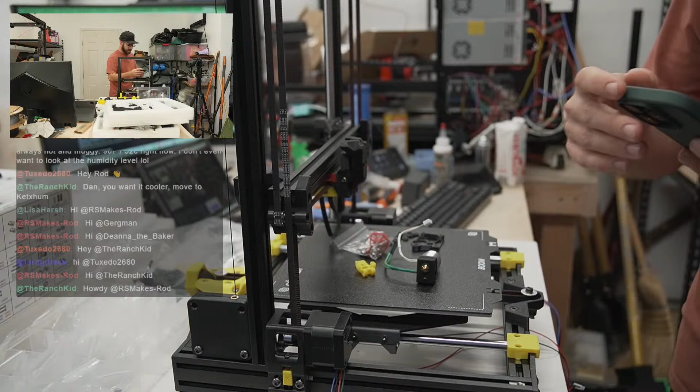I'm gonna show you guys this quick video here. This was me during the storm because water levels were getting above - let's see, this was Saturday, or Friday maybe, hold on. That is me with a snow shovel.

The hail came down so fast and as slush that our drains around the house weren't able to remove it, so it was just dumping onto the house, and it got pretty much to the top of where our slider's base is. I was freaking out that it was going to start working its way into the house, so I grabbed a snow shovel and was shoveling snow this weekend.

It was wild - the most bizarre weather. And then it'll be 98 degrees Fahrenheit next week, so the swings are just insane. Yeah, I couldn't believe it. It was so loud - the combination of the hail with how aggressive it was and how strong the wind was blowing.

It sounded like someone was rapid firing BBs at the window - the loudest sound I've ever heard. Thankfully the hail didn't get above pretty small pellet size, even though there was lots of it, but if we'd had larger hail during that storm I don't doubt it would have shattered windows. It was scary - it went from 'this is neat' to 'oh my gosh, is our house gonna be okay?' So yeah, it's been by far the wildest weather I've experienced.

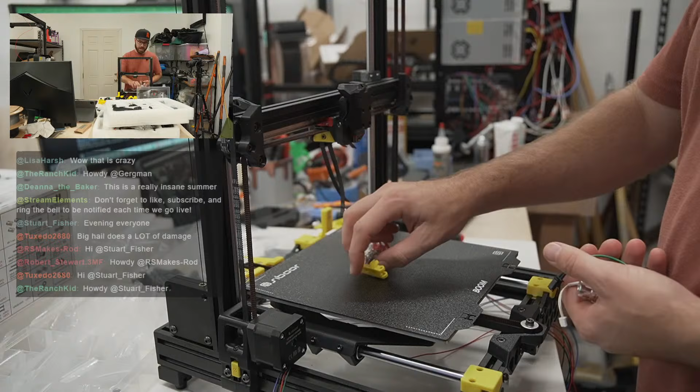The game plan today is that we get the entire tool head done, so that all that's left is wiring, and then we can actually print.

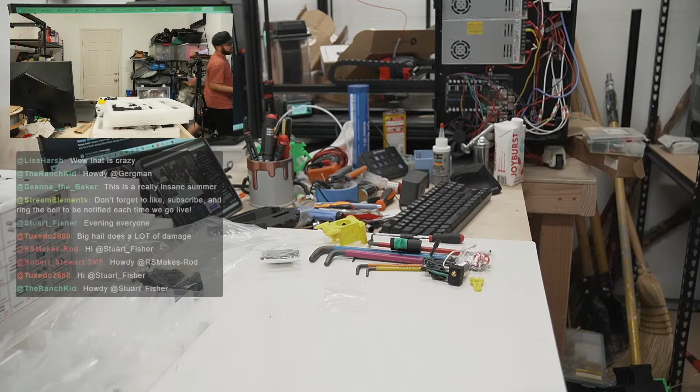So I'm going to- big hail does a lot of damage. Yeah, oops, dropped a piece. I shared that video with a couple of my coworkers, and a few of my coworkers that live in...

Oh gosh, I always forget the name - it's in Calgary. Coworkers in Calgary showed me some videos or photos of hail they got, I don't know when it was, they've been there for decades, but the balls were like that big - baseball size hail, crazy. I know some parts of the U.S. get that too, I think Texas gets pretty aggressive hail. I've never lived anywhere that has hail to that extent.

Okay, let's see. There we go. I think this is on autofocus? It is. That's probably not going to work.

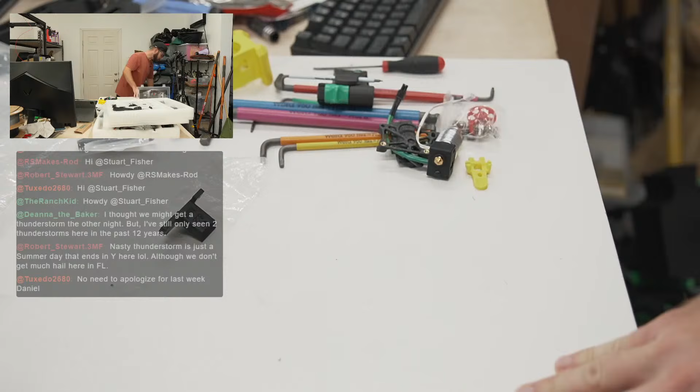Let's do manual focus. Also, in some exciting news, we signed and paid the deposit on the shed, so hopefully next week we get concrete poured. I ended up pulling a permit for the building, so I haven't been able to get a hold of an electrician yet. The game plan is they'll pour the concrete, and the concrete guy is going to put a PVC pipe 8 inches off of a corner and 2 inches in, so there's a route for conduit or electrical wires to go through.

The shed is getting built on the 27th, I think, and then after that I have to get it inspected to make sure it's anchored properly to the concrete. Then I have to figure out electrical.

Maybe between now and then I'll figure out the electrician. I really wanted to go with the electrician who did the lights in here, added all the outlets, and installed the mini split hookup out there, but I called twice and left voicemails, filled out their form online, and it's been like a week and a half with no response, so I don't know what's going on.

We get thunderstorms, and Missouri gets scary thunderstorms. What state are you in, Lisa? I know you're East Coast. Are you not New York? Are you Jersey? I can't remember. A nasty thunderstorm is just a summer day that ends here, though we don't get much hail in Florida. I thought we might get a thunderstorm the other night, but we've only seen 2 thunderstorms here in the past 12 years. Wow, you guys really don't get them. We get them a lot.

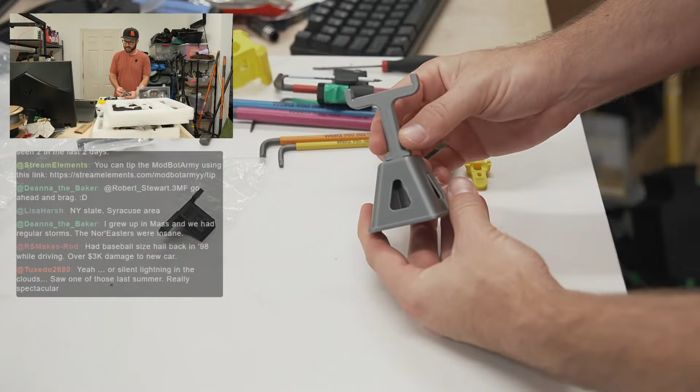I showed Erin these and she said, 'Oh my goodness.' Look at this, guys, look at this little jack stand. It's just adorable. When I saw these I thought, I don't know that I really need those, but once you get the frame built, because of the weight of it all, it helps to have it supported. I also saw someone mention that because of the weight of the finished truck, long term you don't want to rest it on the tires since it can create flat spots, so you put it on these little jack stands. I printed 6 of these since we're doing the 6x6 flatbed, and I had to share them because look at this, it's adorable. So anyways, that's the last of my show and tell for today.

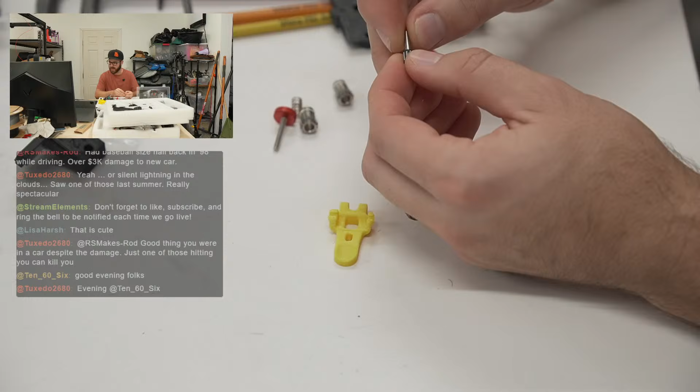It's all BMG clone stuff. I think it doesn't say anything about lubrication, but I'm pretty sure I've always had a little bit on this for those inner bearings. I'm almost positive that's what we always do, so I'm going to do that.

Do I have gloves? I do. Let me grab a glove really quick. These gloves have lasted me forever. I bought a bunch of nitrile gloves at one point when I was doing a bunch of resin printing, and haven't done much resin printing in a while, so they've been sitting. Who's that?

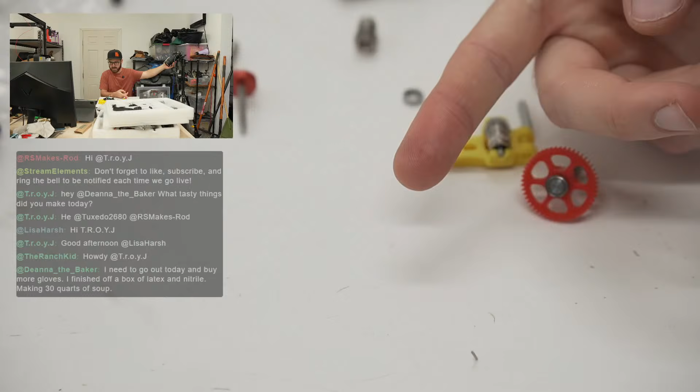There's a tiny, what is that? I don't think I've ever seen this. I don't know, this is just like, maybe it's supposed to be scrap material that just got included. It's a tiny, oops, it's a little metal post. I will put it back in the bag. Let me see, hold on.

What was I gonna say? Sorry, I'm trying to multitask.

Basically they don't offer that program anymore, and if you do part-time, it has to be Monday through Friday, and the cost is like 60% of what our rent was in California, and a little over a third of our mortgage. So I don't know what we're gonna do. Basically, preschool is crazy expensive, is kind of what I've realized, which thankfully it's just for a year, but boy is it a lot more than if you had quizzed me before having a kid, like how much is preschool? I would have come in a lot lower than what the reality is.

Okay, so for this, I am just going to keep this loose, I think, for now. So it's attached to the flat portion of the shaft. It can't spin really, and it can't go beyond a certain point. That could be a bearing. Oh.

Do you think that's part of the piece that I just put in here? Like it's missing. Yeah, now that you're saying that, that makes sense. It could be, that would have been like that when I received it. Let's pop this off and see. I really hope that's not the case, but now that you're saying that, that does make sense as to what it could have been. I hope, please just be like an extra that somehow made its way in here. So I don't have spares of those bearings. It's totally a bearing needle.

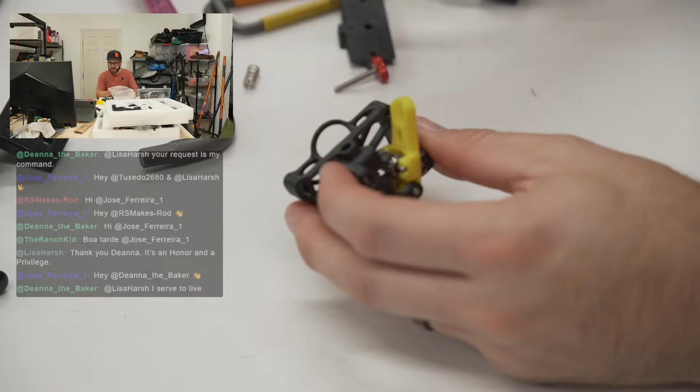Am I wrong? Am I not going to be able to... crap. Oh man, is there no access to the set screw? I might have to take this out, which is not going to be super fun. I assumed there would be access to the set screw on here. It doesn't look like there is, unless... can I go at an angle? Has anyone built one of these before? Am I tripping, or is there no access to the set screw?

I can kind of reach it, kind of. I don't know if that's aligned. Oh wait, you can... no, you can't reach it from anywhere. I can't tell at all if this is aligned. And this is still... it seems like it's spinning. I just don't know if the filament path is aligned. It doesn't look incredibly...

Hold on, let's see. Sherpa guide, I'm curious to see if their guide actually says anything. Alright, let's take a look.

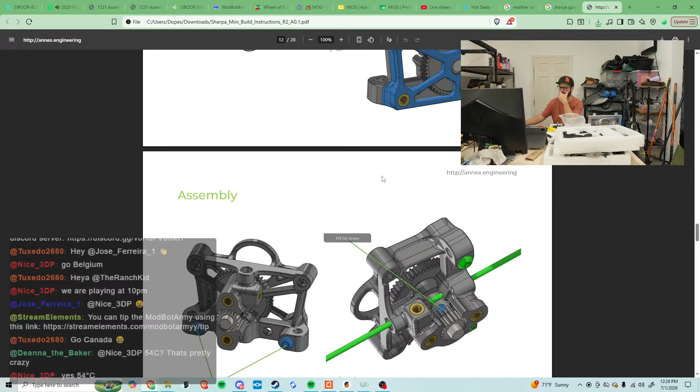Got it, I was supposed to do it prior to putting this in. That makes sense. Okay, so can we pop this guy out? Let's see, first off, can I take this guy off? I can, like that. That came off. I'm so used to doing it after the fact. Why is this thing grinding now?

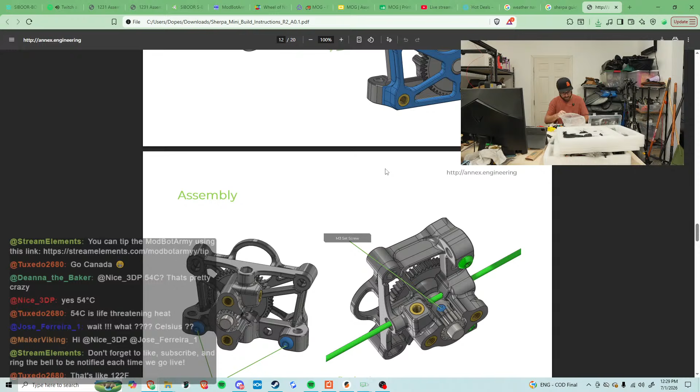Okay. Please give me my driver back.

Hello, there we go. Okay, so it looks like for this, we need to do this now. So let's get our flush cutters that have disappeared. We'll use our wire strippers instead, it's fine. And we will cut off some filaments, like that. Okay, so now this should be included, I think, in the Siboor instructions. I don't think assuming that everyone's built these before and knows when to do this is the right call.

Holy cow. Wait, where is it? Where is it, 122 Fahrenheit? That sounds horrible.

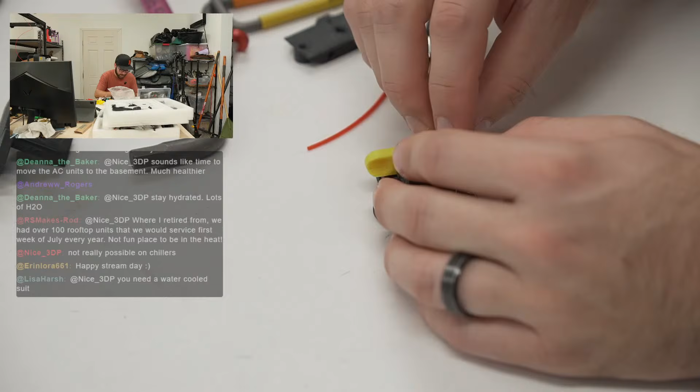Dude, we had like a hailstorm over the weekend, and I was shoveling 6 to 8 inches - no, maybe not 8, 6 to 8 inches of hail that was building up around the house. It was the strangest thing. Today is not that hot, but it's really humid here today, which is probably from all the moisture we've got. But it will be 90 - what did I say? - 96 next week. So we're definitely getting it, the heat is here.

But I lost, it looks like I lost most of the garden. I had like probably 20 or 30 tomatoes that were green and just waiting to turn color, and they got shredded. The leaves are all gone, the branches fell down, and the tomatoes themselves look like someone shot them with BBs. The bird nets flew off of the blueberries, and either the wind and the storm knocked them, or birds came and feasted on all the blueberries. So we will not be getting blueberries this year. A lot of the blackberries got shredded, all the beans got shredded, all the peppers got shredded, all the melons and cucumbers got shredded. So I'm hoping some stuff survives. I Googled it, and it basically said, before you just go out there and remove everything, just let it be for a little bit and see what comes back. So that's what I'm doing right now, but it's hard to look out back at what was my happy place and now see how depressing it looks out there. It just looks really sad.

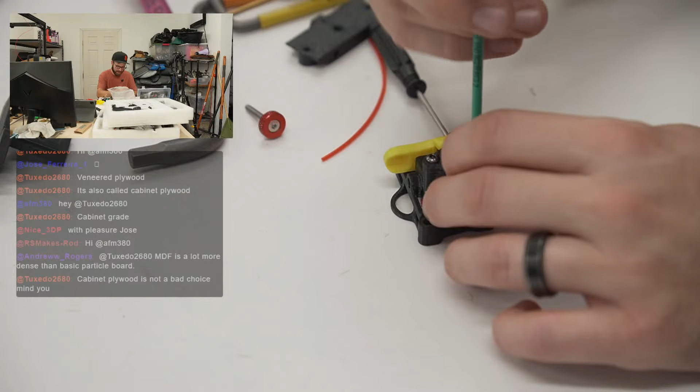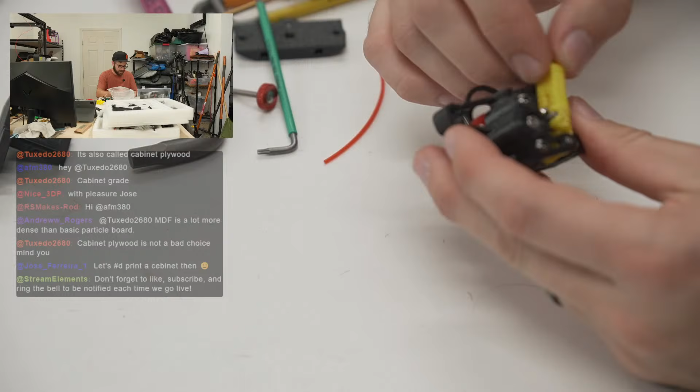Let's 3D print a cabinet then. Yeah, I did plan on, and I still might, because the hinges I'm using now won't be hidden hinges - on the new doors the hinges will be visible, and I really don't care. So I'm planning on probably 3D printing like an IKEA Skadis board that will get mounted to the inner left and right walls of the fish tank. I can use that to hold all the bottles and cleaning stuff. So I'll use some 3D printing with the tank stand for organization, because I think 3D printing for custom organization is like the perfect partnership.

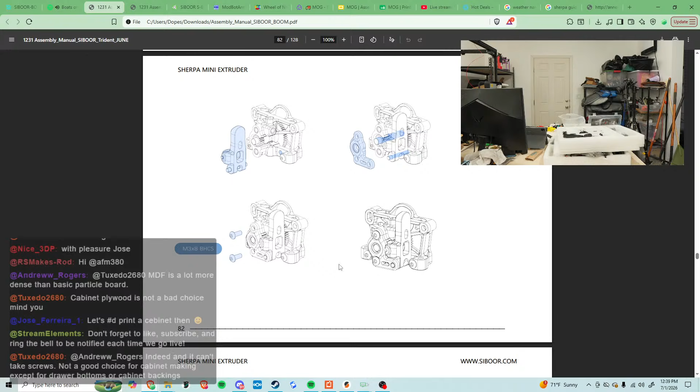MDF is a lot more dense than basic particle board. Yeah, because I've got MDF - gosh, all right, I swear this is the last thing. You guys like this? Yeah, MDF, I don't have particle board I don't believe, but I do have some MDF. That's what's used for my CNC machine for the bed of it. This is what I'm imagining the center of the cabinet's gonna be made out of. CNCing this stuff is awful, it makes such a dust mess, but it's really solid and stiff. It's wood I guess, but it's really dense, like Andrew said. Particle board is more like larger pieces, feels lighter. I don't think I have any of it.

The downside to this stuff is that, like this particle board, my understanding is if it gets wet it just sort of disintegrates. So I'll be applying 2 coats of primer and 3 coats of paint, so it'll have plenty of a seal on it, because there will be water at some point from me doing water changes or cleaning the tank that will work its way down to there.

All right, next we need our extruder motor, which should be here somewhere. There it is, okay. So extruder motor and M3x16s - these are button heads. M3x16s, here we go. Yeah, these are the M3x16s. We need 2 of these.

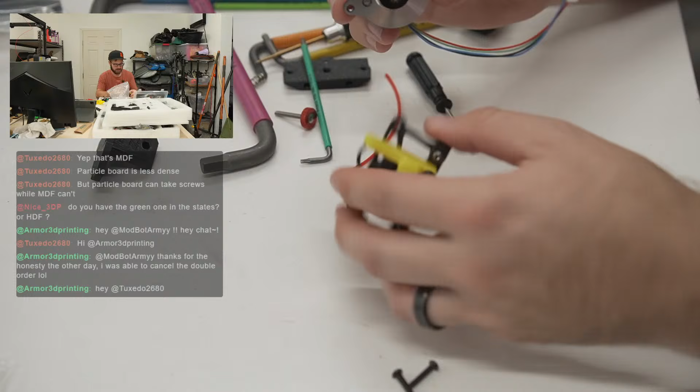So I got a question, random question - it doesn't show which direction the motor wire should be. Let's see if the NX engineering thing does. This doesn't show it either. I'm gonna assume that the wire should go out the bottom.

Screws into the face have been okay for me, but not the edge for MDF. Screws into MDF have no strength. Interesting, I'm working - it's working fine on a table I built years ago, but I'm by no means a woodworker. I assume that if it's a table and the MDF's the top of it and you just screwed it down, it's probably fine because you're not really using it for strength, it's more like left and right shifting would be my thought. But I guess if you're using it for a wall and mounting heavy stuff onto it, I could see the tear out because it'd be different strength.

Hey Raj, hey Benny. Okay, we're gonna just hope for the best. I think it makes more sense to have the wires facing downward, so we're gonna do that. I don't know if that is correct, but that is what we are going to do. About the deploy instructions - there they are, okay.

So my question is, initially I was thinking about just drywalling or sheetrocking the shed, but I was talking to my neighbor and he was trying to convince me that OSB would be a better option just for mounting stuff. So I'm curious to know what you guys think.

I need to get my homework done. Dude, get your homework done, man. I appreciate you hanging out. Priorities, you gotta get your work done, dude. Did you get a nap in at least the other day when you said you were tired? Okay, so that's good.

Man of the Croc with the 28 months. Greetings, all printing people, just got on lunch. Hey, thank you so much, man, how's your day going? All right, so we need our pieces for the hot end now.

Oh, no drywall, okay, so you're just doing OSB. You're doing OSB for it then, for like the full thing.

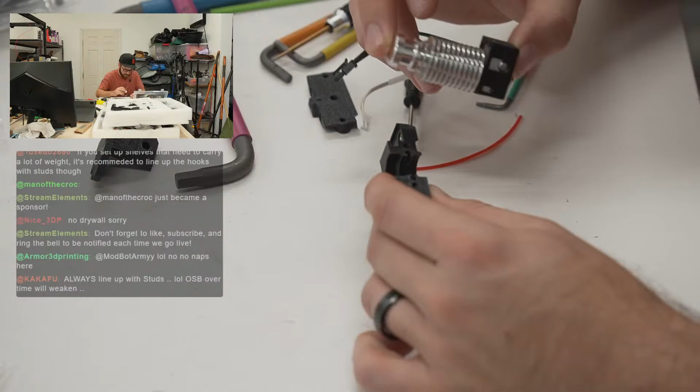Okay, so for this, it looks like it wants to be facing in this direction. Just gonna drop it, why are we not fitting? Did I have it upside down? I probably do, no, I did have it upside down, but why are we still not... in the world? The hook should be facing downward. That doesn't look like that's gonna work. Oh my god, oh that was my heart. I don't know why I wasn't expecting such a big snap like that. It did fit, it did fit. If there's a will, there's a way, that was definitely more oomph than I was expecting. Okay, so we've got this. Now it looks like there should be a thin... yeah, there it is.

No naps? Oh, dude. No naps.

First OSB, then drywall. So you're doing OSB, then drywalling on top of it. That's what I initially thought. That way you have the strength behind it, but then you have the nice aesthetic too. I think the only downside of doing that would be the extra work.

This is loose, we need to tighten this. We'll have to hot tighten it as well. Hold on. If we just tighten the nozzle, that should do it. Let's see, because typically, I haven't had one of these V6 style in a while, but with these, the nozzle tightens up against the heat break, and that's what locks it in.

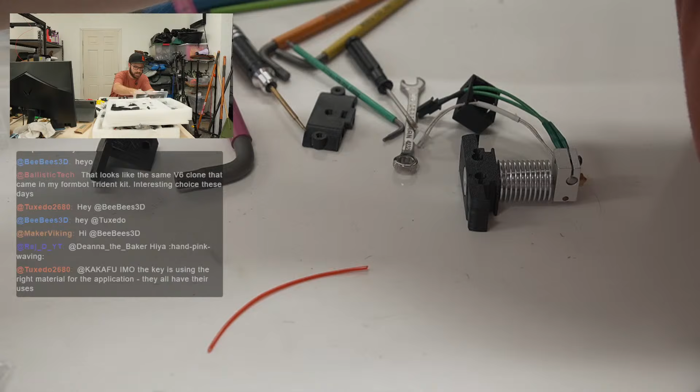I think in some situations the drywall has to come first for fire code purposes. Interesting, I don't use OSB on any of my renos, I see bad things on renos that I tear out, very easy to compare to plywood. Yeah, it's just that this is a shed and cost is a factor, a pretty big factor actually. So that's why, it was either that or drywall. I still am not fully against drywall because that's what in my mind I was going to be doing. It was only after talking to my neighbor, he was like, 'You're gonna drywall it? Why are you gonna do that? Are you gonna live in it?' And I'm like, no, it's primarily for storage, but I'm just thinking for the future since it's gonna be insulated. So I don't know, there's so many ways to do something.

Hey BeeBees, hey Ballistic! That looks like the same V6 clone that came in my Formbot Trident kit. Interesting choice these days. Yeah, I agree, I feel like I would have probably preferred a Bambu style clone because those are really inexpensive and tend to have higher flow and they're smaller. This kit is meant to be a real budget kit, so I guess I understand why they did it, but I haven't- when I saw this in here I was like, whoa, wasn't expecting to see you. It feels like I've taken a time machine back at least a few years, maybe 5 years back.

Drywall is a waste in a shed. You need to print a shed. These are all excellent ideas.

Yeah, you're probably right, I'm kind of getting carried away. The whole point of the shed was really to store stuff, and I started thinking, well, maybe if we do this, it can be this. But I was like, will we ever want to work out of there? And Aaron's like, no. I'm like, all right.

The size we ended up going with is a 10 by 16. I wanted to go a little bit larger, but it would require tearing out the dog run I put in, which I don't want to do - it was so much effort. Or we could do a 10 by 18, but it would bring it 2 foot closer to this door, which would only be 5 foot from the door to where the shed starts. I don't have the shed here to picture it, but I think that would be too close. So I have it 7 foot off this back door where the shed will start, and 5 foot off this side of the house. That's the minimum required - 5 foot and 5 foot from the structure is the code requirement.

Okay, so that is on. Next, we are taking our fans, the fans.

Getting into this, I had to pull the building permit myself, and I've never done anything like that. I must have apologized through email to the inspector a lot because I had to send so many emails. Okay, so I think we need to take the fan wires out of here because they're going to be in this little groove. There was so much stuff that just wasn't obvious to me about what was needed to get the permit.

Originally I thought Tuff Shed was going to be the ones on the permit, but the way our city does things, Tuff Shed had an expired account and they had 5 different accounts, and I'm like, this sounds like a nightmare. Eventually it ended up being like, hey, do you just want to be the general contractor on here - this is your house, right? And I said yes, and he said, oh, why don't you just do that. So that's what we ended up doing.

Okay, so I think this just slots in like this, if I remember correctly. And we'll do our best to line up the fan wires so they don't get too compressed. That seems like it worked okay - hopefully that's okay.

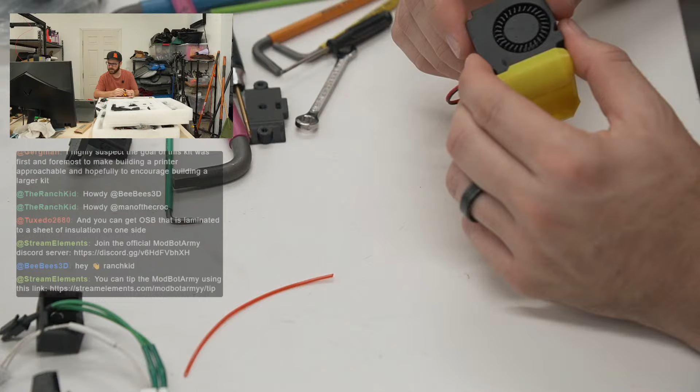OSB is sturdier, lighter, cheaper. I expect the goal of this kit was first and foremost to make building a printer approachable, and hopefully to encourage building a larger kit. Yeah, I agree - it feels like baby's first kit, essentially.

Okay, I don't actually know again what the wiring on this is. I thought at one point there was another set of wires that needed to go somewhere, but this doesn't show that because this is a Sherpa. So we would need Dragonburner, GitHub.

Images, old versions. Pretty sure the instructions are just kind of down here.

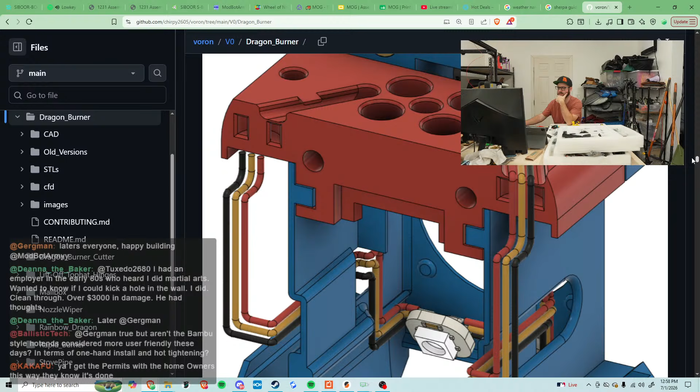I don't think this has LEDs. Yeah, there's no place for LEDs on this, so maybe that's why I'm thinking differently. Unless there are LEDs for the top. Gergman, was there... you left! No, was there LEDs on yours? I don't think there's LEDs. I don't see, since we don't have this down here...

Yeah, I get the permits with the homeowners - this way they know it's done. It's one of those things where since I hadn't done it before, I wasn't sure what I was supposed to do. But once they gave me the option, I'm like, yeah, I have no problem calling the inspector out to make sure. The main question I had was at what checkpoints do I need to get the inspections done.

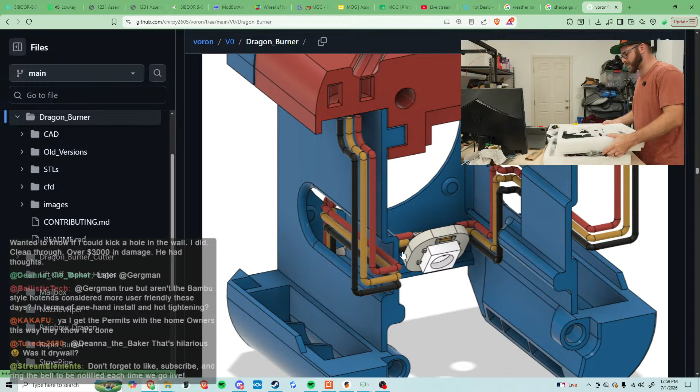They basically gave me the number of the electrical code inspector and the building inspector, and said that for electrical, the electrician would pull the permit since I'm not doing that. For building, the only thing I needed was to make sure I called them out once the building was done, and before I did electrical, to make sure it was anchored properly to the foundation.

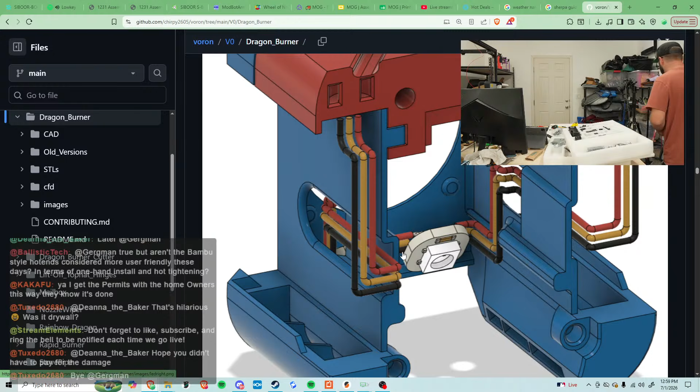Okay, so there are no LEDs on here. I'm looking at this, this is the ToolHead board that's included, and we've got thermistor 0 - I assume this is for the heating element. Hot end fan, part cooling fan, part cooling fan, and we have a motor. That's it.

So there is not. So do they just leave it open on the finished thing? I would think that they would at least place...

There was no check required for the concrete. No, at least that's not what I was told, so I hope that's the case. God, I hope that's the case.

Yeah, for the electrical, they basically said they would need to check that the conduit was buried 12 inches - they said it was either 12 or 16 inches, and I think 24 inches if it was going under like a driveway. Then they needed to check the rough-in after it was done, and once more when the whole job was done. That's what I was told. I can call the building inspector back and verify that, but...

I just want to see whether on the front of this they show... No, these are all renders, there's no actual photos.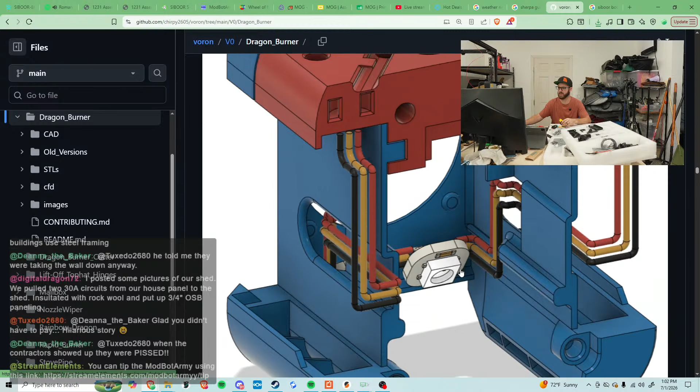So this has LEDs going down and then through there, but where do the fan wires go? On this side, the fan wires appear to go through, and the wiring is getting me on this. I'm debating on watching my own video.

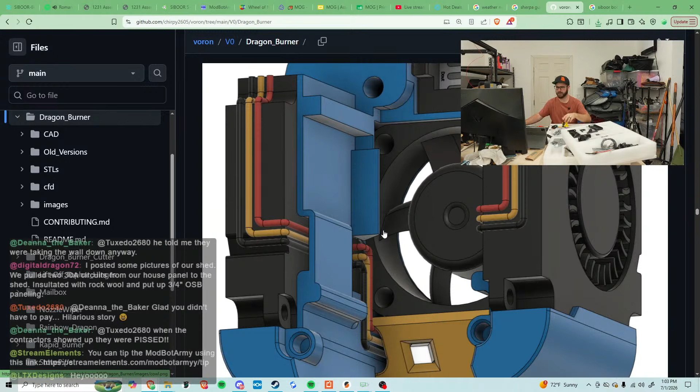Hey LTX, I posted some pictures of our shed. We pulled two 30 amp circuits from our house panel to the shed, insulated with rock wool, and put... That sounds awesome. Okay, I will definitely check that out.

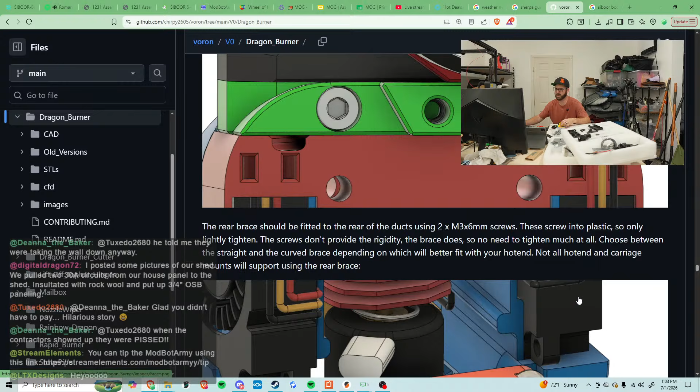All right, I am going to watch my own video on this to see how I routed the wires. So I don't remember.

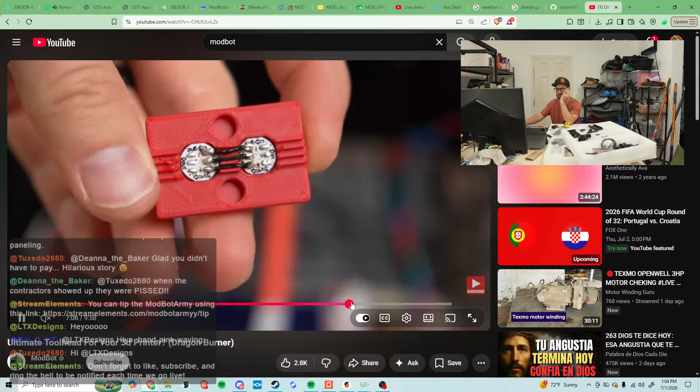Okay, so this looks like the fan just slots in and the wires are going out that side. So I think I need to take off the fan I just put on. Man, that was a bearded me. That was when I was trying to grow out my beard. I actually liked it like that, but it took more work than I wanted.

Okay, so all wires are coming out the back. All wires are coming out the back. So it looks to me like... let me go back to Siboor's manual. Wait, what is... They're doing things differently, and it's throwing me off.

So this is looking like they have their fan wire coming out the top. And then it just goes over this piece. And this wire just comes out there. So let's try that, I guess, since there's clearly a picture of that. So it's not exactly the conventional way of building Dragon Burner. This is a slightly different way of doing it.

Okay, so yeah, it looks like this is basically just slotting in from the bottom. It doesn't want to go in. Okay. Okay, this one looks like the wires need to come out too, actually, because it's going to get smashed otherwise as soon as I get this in. Okay, let's take this out again.

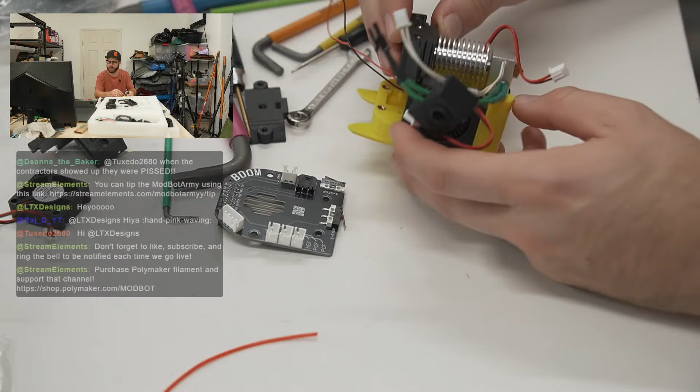Next, we're taking our hot end, and it is sliding in like this. These need to get bent according to the instructions, and then this is just gonna slide in like that. Okay, nice. Yeah, and these wires will just go over the top right there, and then there's our zip ties. Awesome. Wasn't too bad, but it's definitely a different way of routing things.

So next up, we are attaching the top piece. Okay, let's zoom out a little bit. This is just going like that.

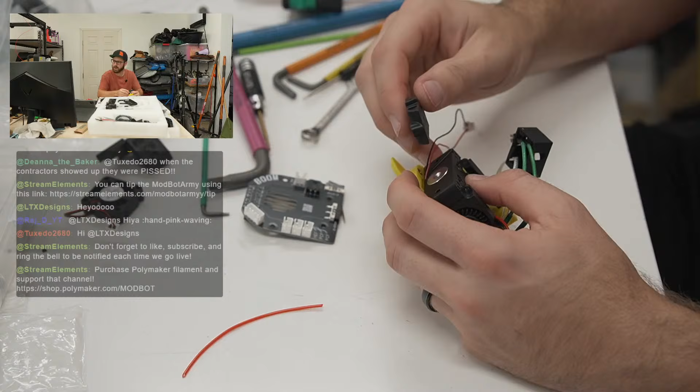Yeah, we need to install an M3 hex nut in a second here, so don't let me forget that, please. But for this, we need M3x20 button heads. M3x20, there they are. M3x20.

Wait, isn't today Canada Day for everyone in Canada? I was about to ask about the 4th, but I'm pretty sure today's Canada Day, right?

Ooh, I should probably put this sock back on too, because the way this is routed is pretty tight. There's not a lot of space to slot this on. Can I get it back on?

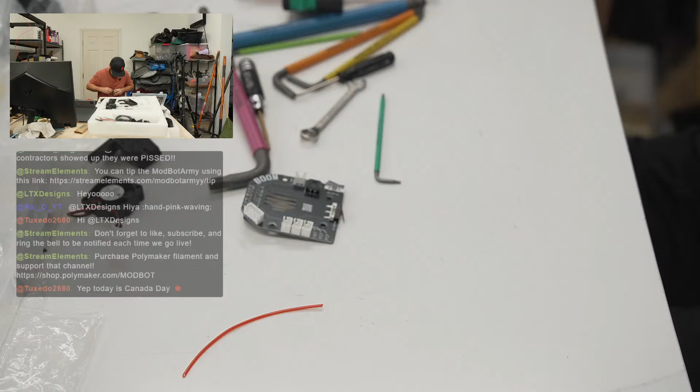Hold on, I'm not looking at chat for a sec, I want to focus on trying to get this piece back on. There aren't slots like where the wires run through on this, there are just... there we go, I got it. Okay, that's not going to be fun after it's on.

Today's Canada Day, happy Canada Day! We gotta do some air horns for that. Is there anything traditional that Canadians do on Canada Day? I honestly don't know much about it, which is odd since I work with a bunch of Canadians, but they never really talk about it. They just say it's Canada Day and take the day off.

Maurice, how's it going man? It's Canada's Independence Day, I'm sorry. Somebody fill me in, Tuxedo, fill me in, give me the scoop.

Okay, that is on like that. Next we need to install an M3 hex nut in the top here, so let's do that before I forget. The only issue is I feel like it's not going to... all the hex nut traps so far in this build haven't been very tight.

Fireworks and beer, definitely. Since we've moved into this house, we do a block party thing, typically at our house out front, since we're at the end of the cul-de-sac. This year it'll be spread out more since they put up flyers for the street, which normally we'd just call the 8 families we know. One of the neighbors will be rolling a grill down here, and our neighbor across the street, we always pitch in and he does a fireworks show. It'll be awesome, it'll be Landon's first 4th.

Okay, so this says the pulley jig can be used to trim the top of the PTFE tube to the correct length. Trim the PTFE tube after you've mounted the hot end to the plastic hot end mount, and after you've inserted the PTFE tube in as far as it can go.

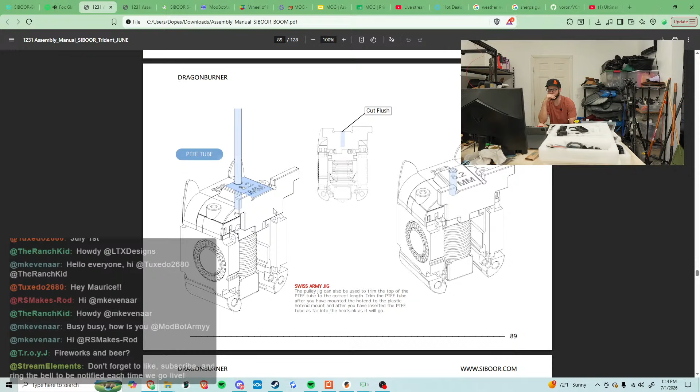Oh okay, I get it. So where is the jig? Is this our 8.2 millimeter? Okay, got it, got it. So basically it's saying trim it now. Where is our PTFE tube?

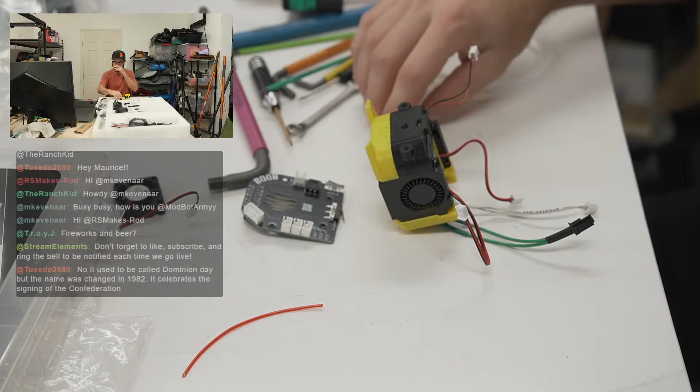PTFE, where are you? Oh, there it is, it's white and it's on white foam so I couldn't really see where it was. Okay, so it looks like it wants us to slap this on like this and then shove this through here, through there. Okay, so that's how we want it.

Now, what do I have to cut with? You know, I cut myself pretty good with a razor blade before, so I'm trying to avoid using just razors on their own, but that might be all I have right now. It's just these razors. I'm going to do this not zoomed in, just in case. Give me a sec, wish me luck, I'm going to be quiet while I attempt to cut this.

Okay, that worked, that was a little scary. Putting the razor back and popping the top back on it.

It used to be called Dominion Day, but the name changed in 1982, celebrating the signing of the Confederation. Got it, nice. Is there anything people traditionally do on that day, or not really?

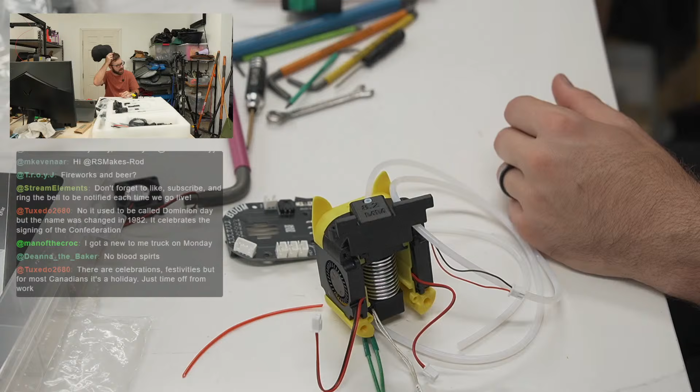I got a new-to-me truck on Monday. That's awesome, congratulations, no blood spurts? No. Yeah, I cut myself, it doesn't look bad at all, just a tiny little skin thing healing over there. But I was opening a box with a razor blade and I was tired, and those are not a good combo. The razor stopped going but my finger did not, so that was not fun.

We will... do I have a... there should be a V-bit somewhere here. Here's the empty box for where the V-bit should live, let me see if I got it. If not, I know where some of my CNC tools are, so I can grab another one, but there should be a fairly large V-bit laying here somewhere. Not seeing it. Oh wait, no, I hallucinated and thought I saw a V-bit. Where are you, where are you?

Okay, I am going to grab another one. Give me un momento, they should be in this box. Let's see, this box is for drip irrigation, this one is for end mills. There we go. I'm gonna put it right back in here though, because I had two of them and I'd like to keep one for actual CNC stuff. So let me use it really quick and then put it right back. I'm only allowed to lose one.

So we are just going to take this little V-bit and spin, spin, spin, spin. I'll do a tiny more spin. Okay, that looks good. That is on. Let's put this back in here and back in here.

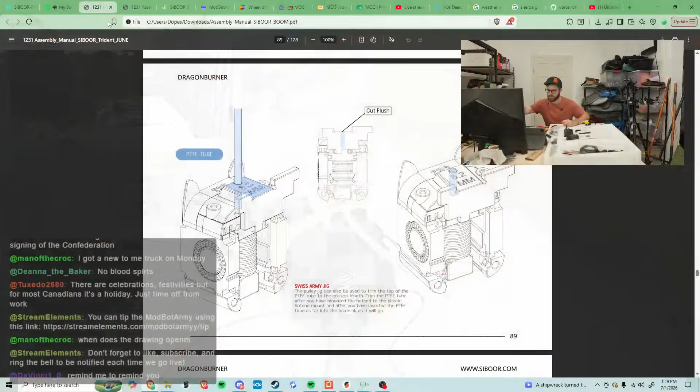Okay, so we've got our PTFE in, and next we are installing the extruder. There hasn't been anything about wires yet.

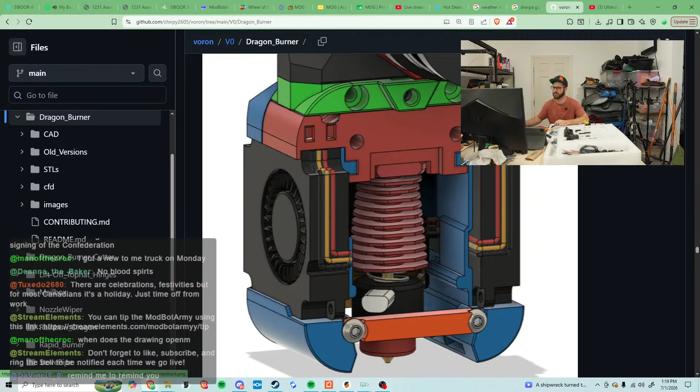Okay, so it looks like the wires are basically just gonna be ran upwards. So that's kind of the downside of having this guy right here, because he's up here now and he's just really long. So I might end up recrimping this guy, but for the rest of these I think they're pretty much just going on like this. I think these guys just kind of route up sort of like this. Yeah, let's at least attach a few of these guys.

I did see zip ties a second ago. These might be too big. Did they give us zip ties? Yeah, they did. Whoa, are they smaller? They are smaller.

What kind of truck did you get? Remind me to remind you. Perfect, sounds like a plan. Okay, that's not going in easily. There we go. Wait, there are celebrations, festivities, but for most Canadians it's just a holiday, time off work. Got it. So that would explain why most of my coworkers just don't really talk about anything they're doing and just say it's Canada Day, I'm not in.

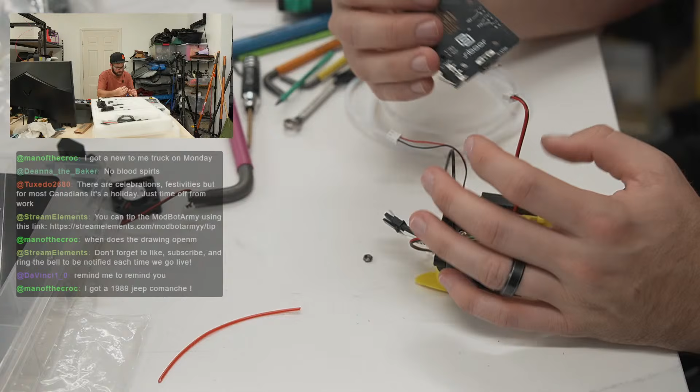This is for the hot end fan. And assuming this is going - wait, is this mounting up top possibly? Hot end fan would be right here. I'll just end up crimping this one. Actually it probably goes like that. I don't know, I'll just end up crimping that one after. I don't know how much length I want. I'd rather have it longer now than cut it too short and have to solder on additional wire.

1989 Jeep Comanche, it's definitely a project but a good one. Nice. Is it driving right now, in driving condition, or did you get it as a project vehicle that you're gonna repair and sort of restore?

Okay, probably shouldn't have done it that tight. It'd be nice to have a little bit of slack. There's a little bit of slack. Okay, so that's good. I did find flush cutters.

Now, let's not forget our PTFE tube is going in this direction. Now we're taking our extruder, and our extruder is mounting like this. Nice.

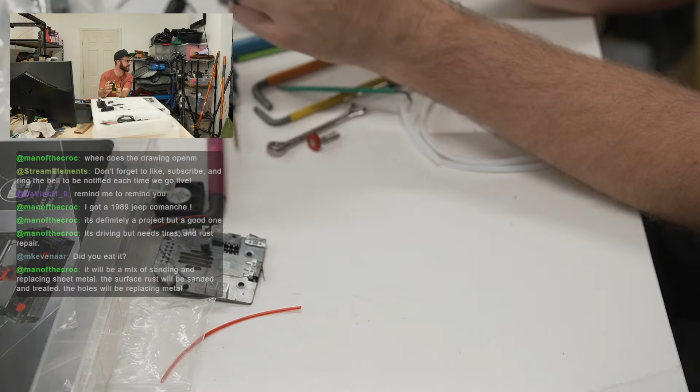What's Jack doing playing? Either playing Mario or... mm-hmm.

All right, Deanna wants to see the baby. All right, let me grab this guy. He's still in PJs. Hi. You would say hi, just woke up. I'm your big dog. All right, I'm gonna bring him to the close-up cam. Wait, I think I'm on the close. Yeah, I can't tell if he's visible. Yeah, he's visible. Wait, Landon, look right here, look at the camera. Whoa, he said hi everybody. You excited for your first 4th of July, buddy? Excited for your first 4th of July?

Yeah, he's spending a lot of time on his feet now. This is our big baby. Yeah. What do you think, huh? He doesn't come out on this side of the garage very often, so usually when he's out here he's like, there's a lot of stuff to see.

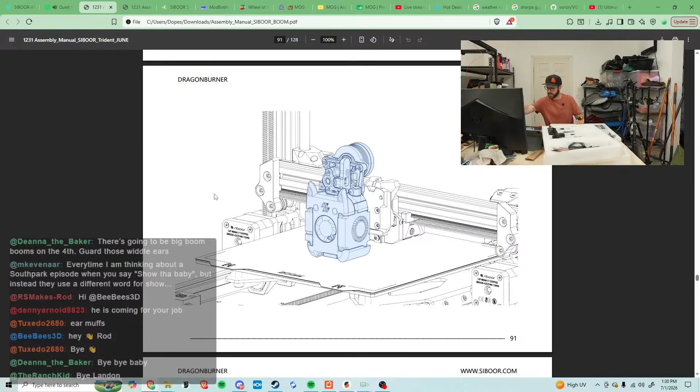Okay, so that's on. It looks like we're basically mounting this now. So let's do that. Let's move as much of this stuff out of the way. Oh, let me put the... I just realized I never put the tension screw back on. The tension was kind of crazy on this, even without it really having tension. So I'm curious to see how that does and whether I need to go with a different spring, but we'll see.

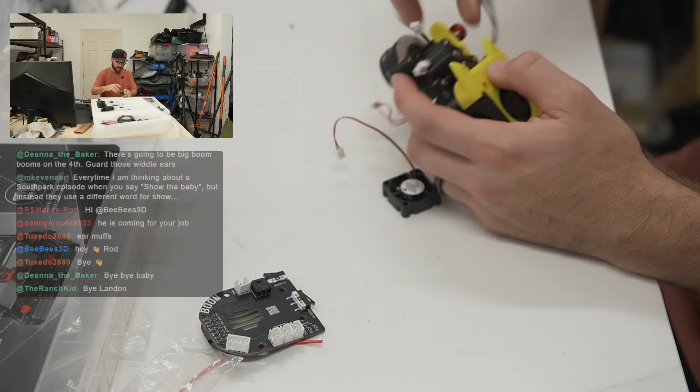Let me let Monkey in. Monkey! Come on, bub. Come on, this way.

Okay. I probably need to cut the belts a little bit on this too, now that I'm thinking about it. Let's see.

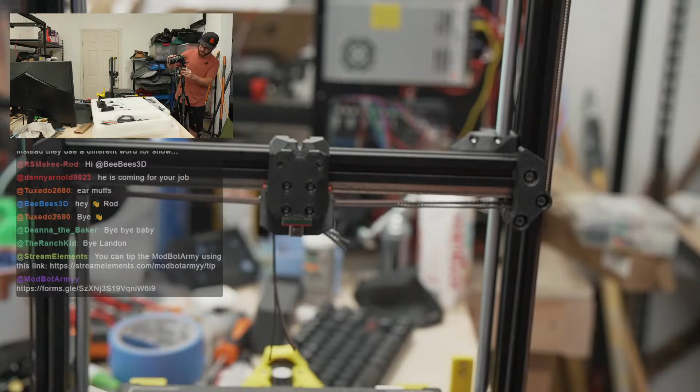And I'm just gonna, we'll go from this angle. Make sure this is in focus. Yeah, it looks pretty good, right? Okay, so I'd like to keep some belts if I can.

Oh yeah, this won't be able to go. That's interesting. So the toolhead cannot reach all the way. That's as far as it can go. That seems wrong - it binds, like, okay, that's where it stops. It's basically, I don't know, is that a 20 millimeter gap? And it's on both sides. Doesn't seem right to me. Why would that be the case?

I think I installed the belts wrong. I think the belts need to be higher up. The belts are at an angle. I think this is wrong.

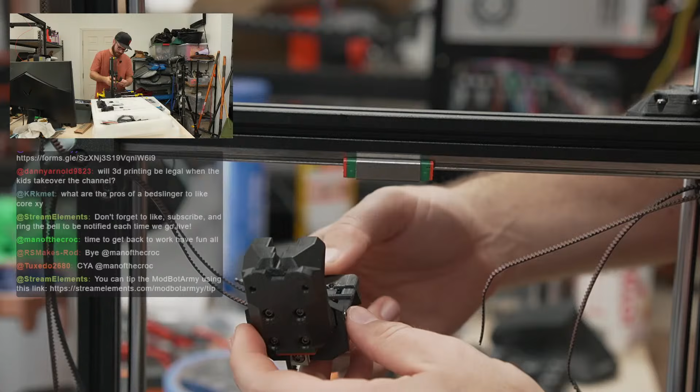Yeah, there's holes on top, so the belts need to go basically through here and then get grabbed, which is the wrong one. It makes a lot more sense now. I thought it seemed funky, I should have questioned it more when we were doing it.

Now that we've got that in, I actually don't think this will be that hard to correct. So we can now get this piece at least slightly back on, and we'll deal with the specific tensioning in a bit.

Yeah, and we can still pull this tight after the fact, so let's just leave this. Actually, we'll tighten it up so it doesn't fall out on me, but that should be fine. And then on this side, do the same thing. So we'll remove this.

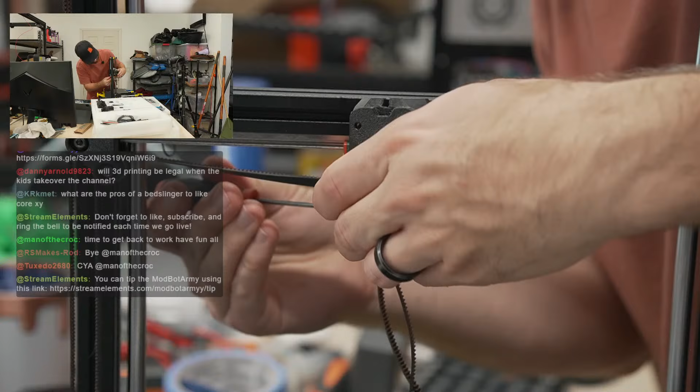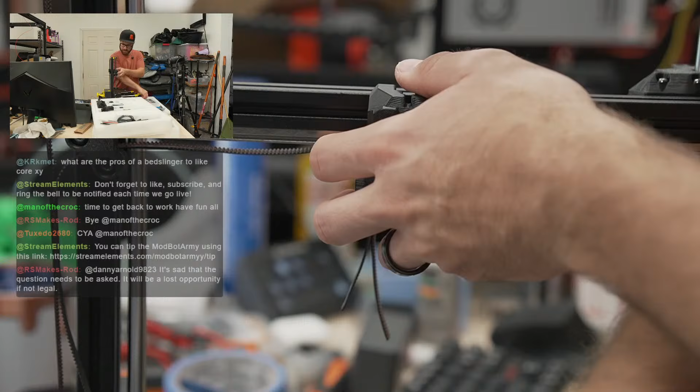Okay, drop this through here. Like that, drop this through here. Like that. Okay, now that that's in, I should be able to just... Actually, okay, so once I compress this, these belts aren't going to move at all, so I need to not fully seat this. I need to basically just thread this in a couple turns. So let's see, yeah, let's just do this a couple of turns.

Can I still pull this? Wow, that's... oh, I tightened that one. Can I still adjust you? Yes, I can. Okay, so that's what we need to do. We need to put all 4 of these screws in, just a couple of turns. Okay, that's in. That can still be adjusted.

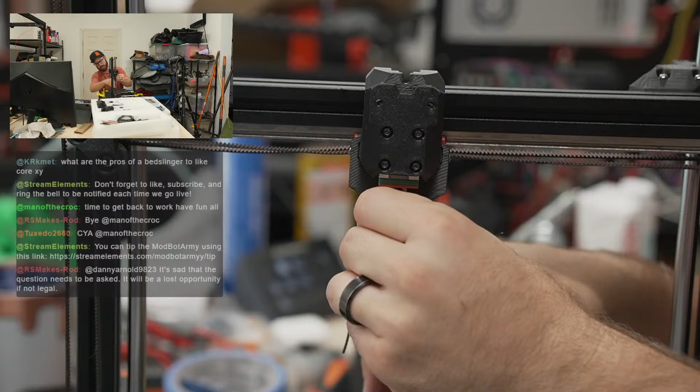Okay, so I am going to do my best to make sure that these are pulled evenly. So that seems basically correct. Now I'm going to tighten these down. Yeah, those look even.

Why are we spinning still? This is just infinitely spinning. That doesn't seem right. Oh, it is holding tight, so I won't question it.

Spectra, how's it going? Kenneth, how's it going? I just got this back on, and like we built the tool head, and I was going to mount it, but when I moved this to the side, I realized that it couldn't actually go all the way. It still can't go all the way.

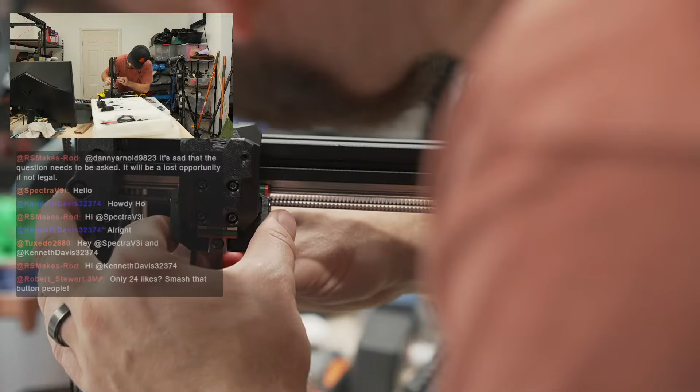What is going on now? Hold on. Okay, now I don't know what's going on, because the belt is straight, but it still is kind of binding at the ends. It is still stopping at the same distance. What are we rubbing on? That's what I'm not understanding.

It's not our belt. Huh.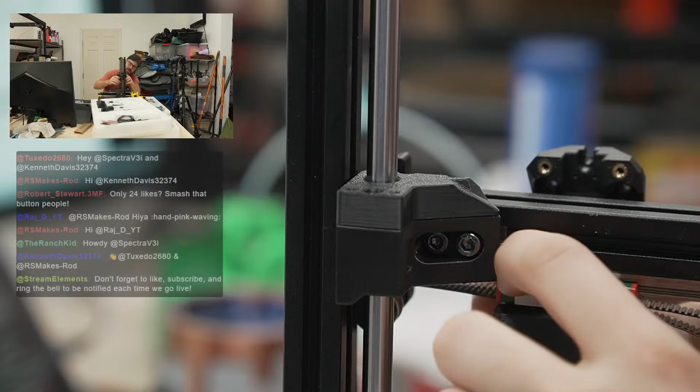So it looks to me like what's happening is that once this block gets right here, it's rubbing on the metal of the block. So why is that happening? Yeah, it's definitely what's happening because it's starting to wear the plastic.

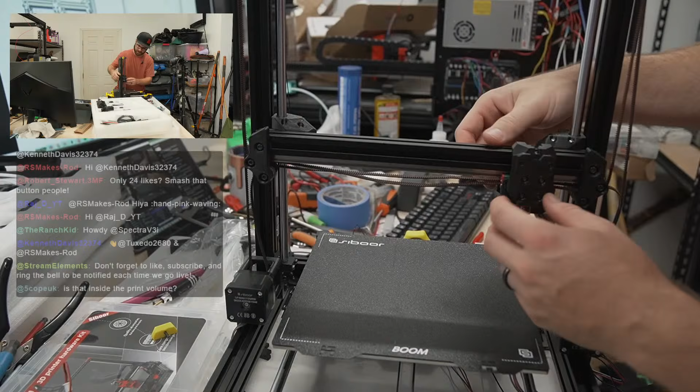So if I attach this, hold on. If I drop this, I should tighten all the belts again because regardless, let me get the belts done before they pop off a pulley or something. So that's routed fine, that's routed fine. Those look still centered. Oops.

Hold on, let me just make sure that everything looks like it's still... Nope, you're not right, you need to scoot over just a hair. Like that. Okay, everything else seems fine, so let's tighten this up.

Yeah, it's interesting. I mean, they provided the printed parts, so I can't see it being a tolerance thing with the printed parts, unless they went with different rails at one point that are slightly wider.

Okay, can we still pull this? Yeah, we can. Okay, so I'm gonna... Alright, it seems pretty good. This needs to get pulled one more. Two more.

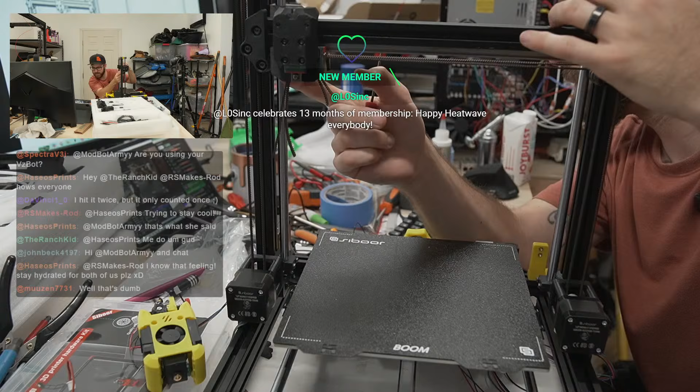Los with the 13 months, thank you, happy Heat Wave Wednesday. Man, so everybody's feeling the heat. Yeah, it's hot in here today. I don't know what it is in the garage, outside it's only like 70. I should have the garage open.

Oops, Tampa weather - so today the high is 81, then it climbs to 84, 88, 95, 91, 94, 98, 98. Oh, next Wednesday is going to be brutal for you guys. That is going to be awful, considering I'm sweating pretty hard right now and it's 81. What's the humidity today? It says it's only 38%. Today should be nice, I don't understand.

John with the 7 months, thank you man, that's crazy. That does feel - because you joined during the Micron build, right? It's like 96 Fahrenheit, oh gosh. Yeah, so quite a few of you are in New York City then. That sounds horrible. I wonder if when the heat wave comes this way, it's going to be nicer for you guys over there. Do you know if you're supposed to get better weather next week when it gets hot toward the western United States?

Okay, before I tighten anything firmly, I want to verify that this is still sliding smoothly. Fingers crossed. No, it's rubbing again. I wonder if I need to apply more push force when I'm tightening it.

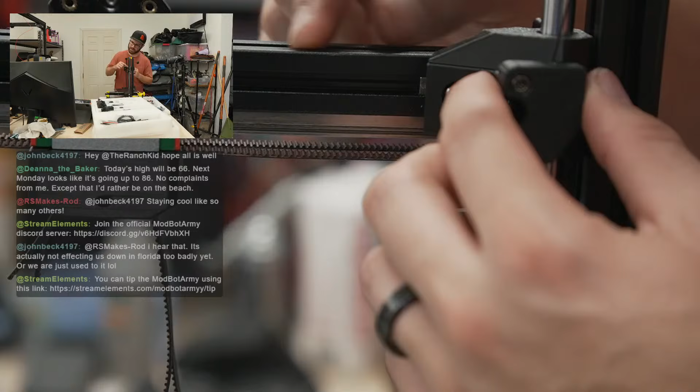Someone had the idea, I can't remember who it was, Clown that had the idea? I think it was Clown. No, Lord Git. It was Lord Git. They had the idea of try loosening, because I used an alignment jig to center this rail, but they had the idea of, hey, maybe if you loosen the rail, you can have it favor this side because I don't need very much. And it's like when it's loose, it seems to be working fine, but when I tighten it up, it was rubbing again. So the other idea I have possibly is if I loosen these screws and see if I can make the extrusion favor the bottom side of the T-nut, maybe the combined effort of both of those things would clear it, you know?

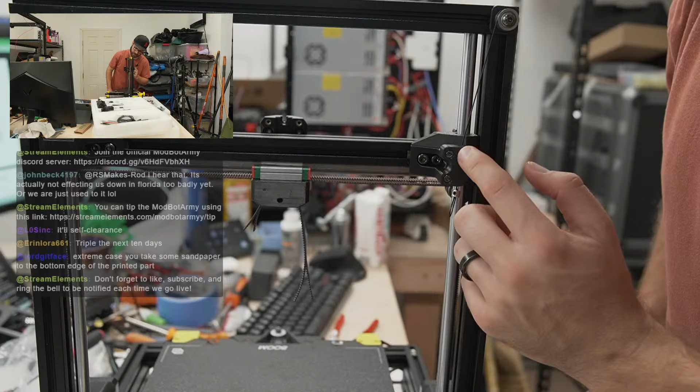Extreme case, take some sandpaper. Yeah, it wouldn't honestly take a lot of sandpaper either. I just would rather not disassemble, because where those are, since it passes through the bearing, I'd have to take this off, which is no big deal, disconnect this, but then this is bolted up here, which would mean I'd have to remove this, which would mean I'd have to remove the belts. The disassembly process would kind of suck.

If I had to, I would. I mean, it needs to work, but I'm hoping that with a little bit of play, we can get it to work. Because yeah, even just loosening the screws a few turns, it's perfect right now. No friction. But when I tightened up the rail, I saw that it didn't just tighten up, it twists a little bit, because when it's loose right now, it's got just a little bit of not just left and right play, but angled play as well.

So I feel pretty confident we'll be able to get it. But yeah, I am glad though that we found it now versus when the printer's done and I went to home it and there was just problems. But it is interesting, you'd think they would have built a little bit more tolerance and that this wasn't necessary.

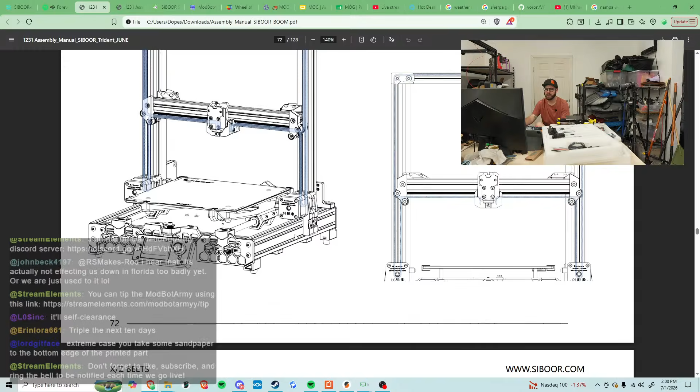Okay, let's see if we go. Yeah, so there's that. So we wrapped up the ToolHead.

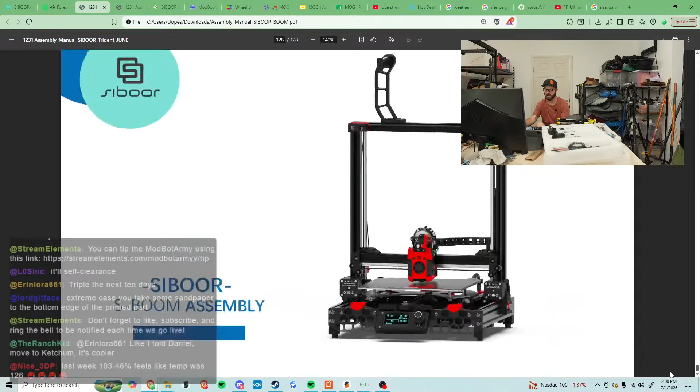Yeah, I'll basically get us to here next week. So next week we are installing electronics and wiring and powering on. That'll be the game plan.

I want to say we'll just stream for 3 hours next week so that we can definitely finish this, but with it being 100 something degrees, there's no way I'm gonna be able to.

Jack? I think Jack wants to say hi. Let me see. Oops.

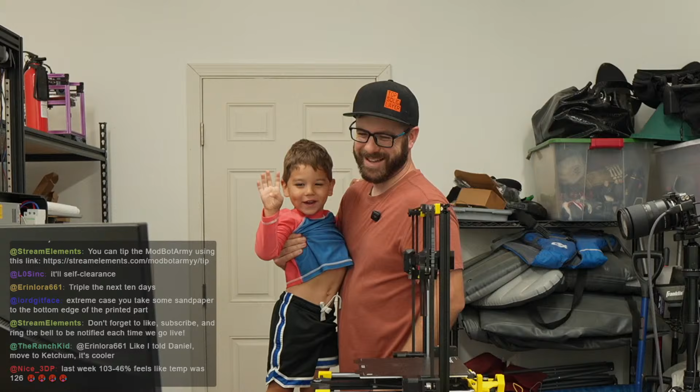He said, hi everybody. I like your Spider-Man rash guard. That's pretty cool. All right, so it's a new one. I like it a lot.

All right, so you been eating peanut butter? You need to smell like peanut butter, dude. You're just making Daddy hungry.